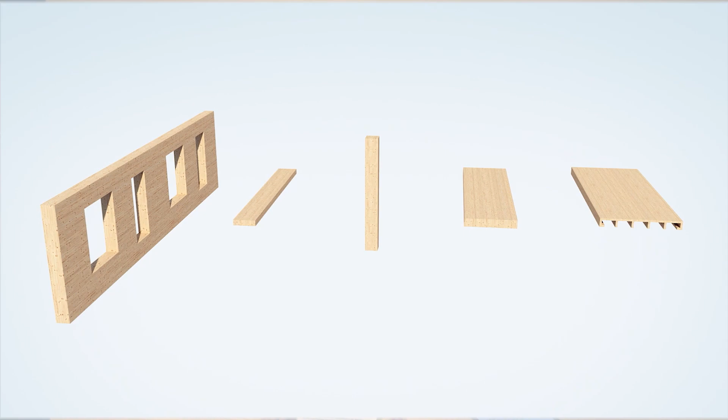Well, Stora Enso has been producing mass-engineered timber elements now for over a decade. In fact, we're one of the world's largest mass timber manufacturers. And all of the elements and components that we produce are made from sustainably harvested forestry. So what we do is we take these trees and then we produce these very bespoke components using the latest in CNC technology. So this is millimeter precision cutting and assembly.

And then what we find in the factories is that there's a very low waste, and the very small amount of waste that we produce, we then actually recycle into biomass energy. So it's a very sustainable form of manufacture. Once we've made these components, we then deliver them directly to the building site, and they're loaded in the perfect order for the build sequence. So this makes the actual assembly on site really efficient.

We've supplied now over 15,000 projects worldwide, and these projects are using components such as Cross Laminated Timber, Laminated Veneer Lumber, both beams and sheets and panels, and also our new products like CLT rib panel components for floors and roofs, also stair components and construction beams. But now we're doing more than that.

So rather than just supplying the material, what we're now trying to do is offer everyone the advice and the guidance needed to not only make these buildings very efficient in design, but also giving all the key information to make the right decisions for all the key stakeholders. So people like developers, investors, quantity surveyors. So we're not actually building these buildings ourselves, but what we're doing is providing the guidance and the best combinations of these different components to make the building as efficient and as cost efficient as it can be.

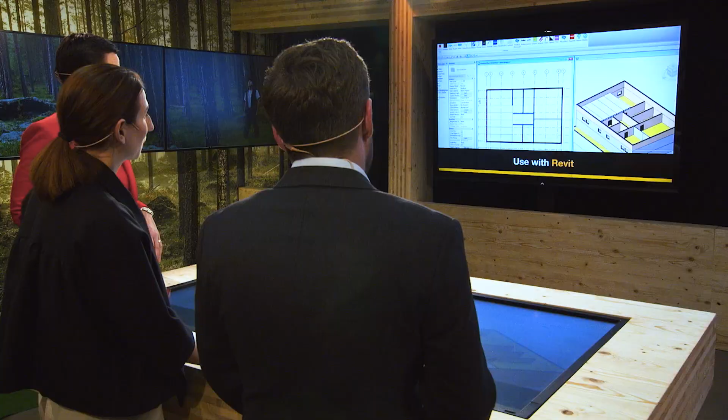Anything to add, Jessica? Yeah, for an architect, this concept brings you the grids that you can use when you're planning for a wooden office building, and the flexibility regarding the facades. It shows examples of how to reach building regulations applicable for most national building regulations within Europe. The build-ups are uploaded in our digital library called ProdLib, where you can drag and drop the BIM objects directly into your model.

For a structural engineer, it provides you the information on what product to use. And these are also in our structural calculation program, Calculatis, which is web-based and free to use, and you can be several engineers working in the same project at the same time. Another good thing about this concept is the information it brings regarding services. So the mechanical, the engineering, and the plumbing, called MEP. And it shows how to design these parts in the most efficient way. To get a quick overview of what we are talking about, take a look at this.

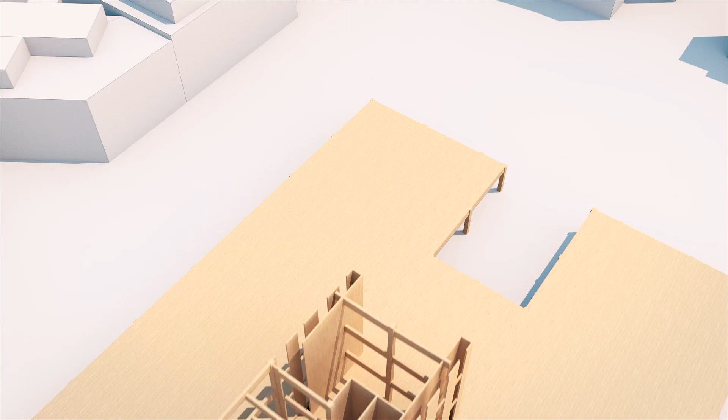Gareth, you mentioned the wood products like the CLT and LVL, and we see the applications here like the walls and the floors and the roofs, etc., and then the concept, of course. But how does it work? We have a screen here with the different parts on. Could you walk us through it? Yeah, sure. So I'll show you on screen.

I think one of the most common design features that we have in modern office situations is completely open plan. And there's a number of reasons for that, but the main one is that these buildings are due to last over 100 years, and the company's use of that building and also changing companies in that building means that it needs to be flexible internally.

So this very much leads to a beam and post design, or a column and beam design. This is taking most of the structure, and what that does is allow the internal walls to be non-load bearing, so they can be moved around and adapted in the future very easily.

So when we look at the columns themselves, these can be either Glulam or Laminated Veneer Lumber. These are very strong beam elements, and they can also have pre-fitted fixings that are very simple and easy to install on site, so they kind of just click together. And not only is that quicker on site, but it's also safer. There's less working at height and things like that.

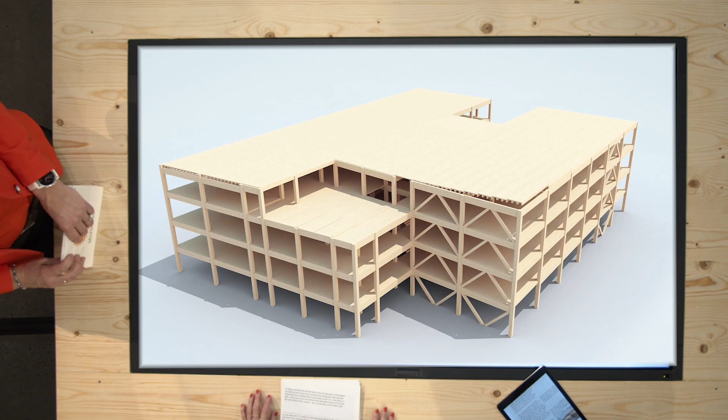And the whole idea of this concept is it provides the tips and advice to do just that, but it can also give you the confidence that it's going to be technically applicable, it's cost effective, and that its efficiency is high in terms of the overall building design.

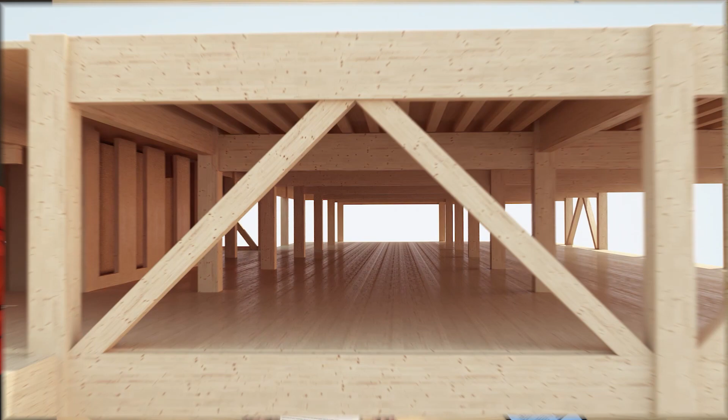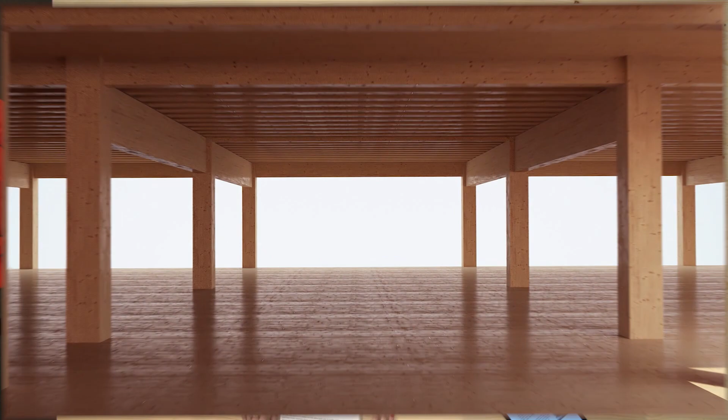So when we look at each of the individual products, first of all, we have Cross Laminated Timber, which is used primarily for walls, floors and roofs. But we also have LVLG now, and this is a new product that is very similar to CLT, but it's made from LVL instead, which is an incredibly strong product. And because these can be CNC cut, you can easily add openings, windows, doors and things.

When we move to the beams and columns, as I said earlier, this is primarily Glulam and LVL, but we can machine these to any length. And not only machining them to any length, we can also add things like slots for steel plates. We can pre-drill holes for beams. The whole idea of this is to make the assembly process on site as quick as possible.

When we look at our rib panel components, we have CLT rib panels, and this is where we have a thinner CLT panel, but with Glulam beams glued and screwed to the underside.

And because these are glued in factory conditions, when the glue cures, it actually forms this really strong composite element, and that means that we can span large distances under high load with very little deflection. And LVL rib panels are very similar to CLT rib panels, except we're now using LVL beams instead, with an LVL sheet on top, which is glued and screwed.

And LVL itself is an incredibly strong timber product. In terms of its strength to weight ratio, it actually outperforms steel. So we're talking about a really strong timber element that's also lightweight. And just to give an example of that, an LVL rib panel doing exactly the same structural job as a concrete slab is actually about a tenth of the weight. So that's what makes it so structurally efficient. So what we do is we take all of these different components and we combine them in ways that make a really highly effective office building design.

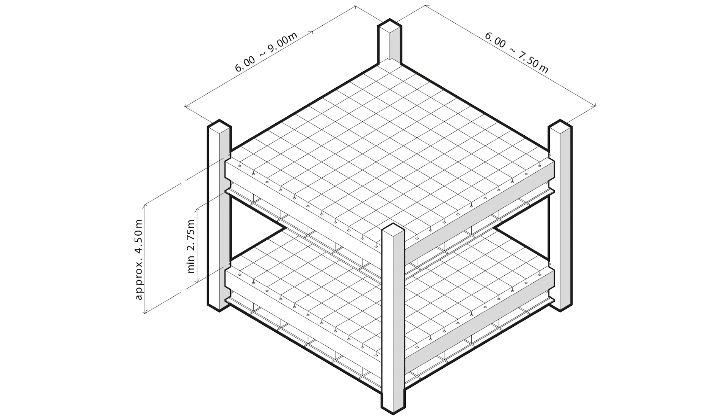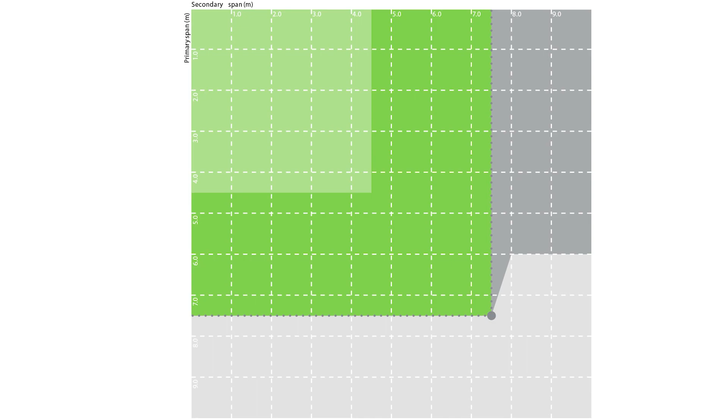The grid is one of the key things that in an office building you want to set out from the very early doors of your design. So we did a lot of work in the background to think what's the easiest way to give information that the grid is suitable for a timber solution. So we've put together a simple chart that will tell you whether the timber grid is efficient or not, and we've worked on that basis.

Well, we went through quite a lot of processes of how to coordinate the structure and services, because you want that zone to be in the same area. You don't want your building to go too high and push up costs there as well. The original option was a duct beam, but we thought that's not clever enough. How can we actually get rid of that, because that also has issues with it. So we've devised a system where we have corridor zones for your MEP to be able to sneak around the structure and poke into areas where it's needed. You don't have to go through a structural beam.

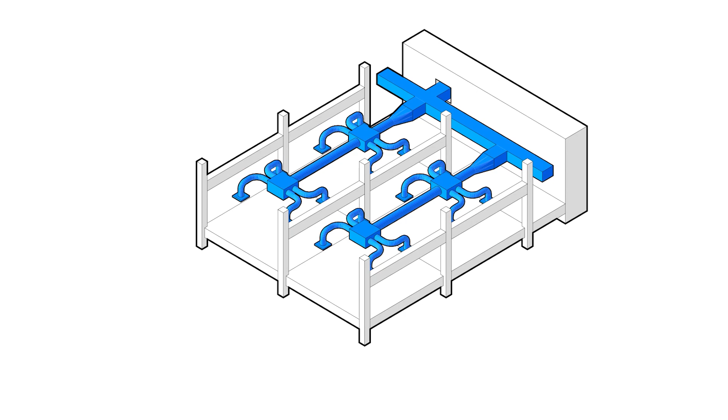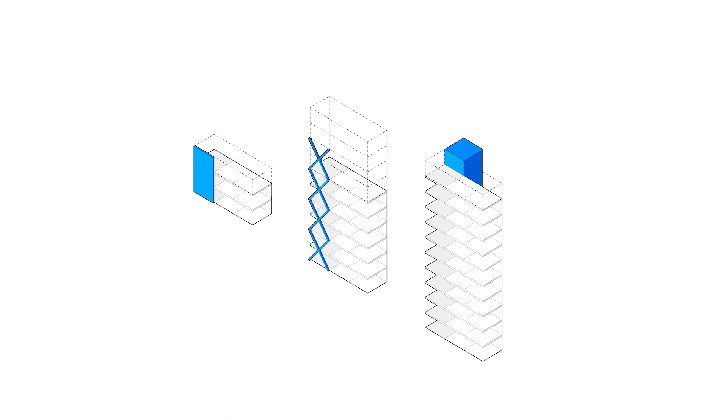In terms of height, again, this is a guiding hand, and your building stability will be key. We could have done this concept just for one building, but actually we want the concept to be for all timber buildings. So your stability will work in one of three forms. Either you'll have CLT walls, and that can do a certain height. If you're going a bit higher than that, you'll probably change to a braced glulam bay of sorts. And then if you're going really high, the likelihood is you can have a hybrid system with concrete as your core, and that braces the building, and then have a timber frame that can take the gravity loads.

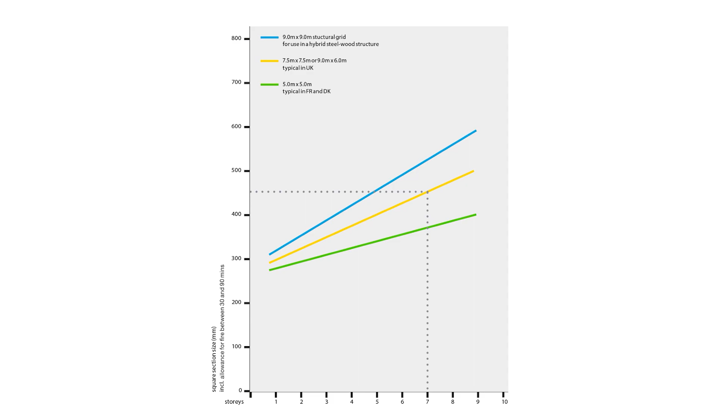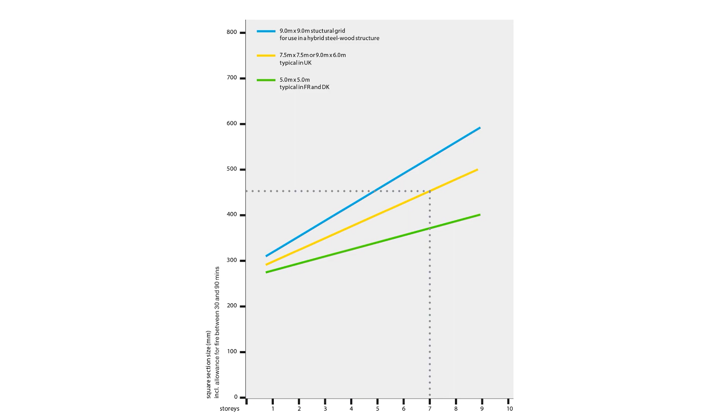The size of a column can affect the area that you have within your office. So it's quite key to be able to very quickly work out how big your column is going to be. So again, we've put some very simple tables together, and instead of relying on the load that, say, an engineer can read off, we've turned that into how tall is your building. So if you have a number of storeys and you've got a fixed grid, you can very quickly work out the size of your column, and that includes fire scenarios as well. So you've got an accurate depiction of what sort of area you're taking up with your column spaces.

Timber and connections go hand in hand, so you have to do one with the other. They're not a separate item like you can possibly do with steel and concrete. So with timber there are generally two forms of connections. You can go down a fabricated route with flitch plates and dowels and bolts, and that's quite a traditional way. Or you can follow the proprietary systems that have been developed over the last few years, which are clip in and go, and they're quite fast to erect on site, but they're also more expensive. So we've done a very high level information sheet within the concept here giving people the information. You can go for the fabricated one, and that can save you a bit of cost and a few other issues, or you can do the other, and that can save you time.

And then it's up to you as the contractor, designer, whoever you are, to pick for your building which one is the right solution for you.

For this concept, acoustics comes down to the floor build-up and how you're going to make that achieve a certain criteria. The interesting thing about this concept, again, it's not for one particular country, it's for many, many different countries. And they've all got many, many different regulations for their acoustics requirements. So the job we had was filtering that down into a performance criteria, and that is sort of a low, medium, high, and then you can pick which one is suitable for your building.

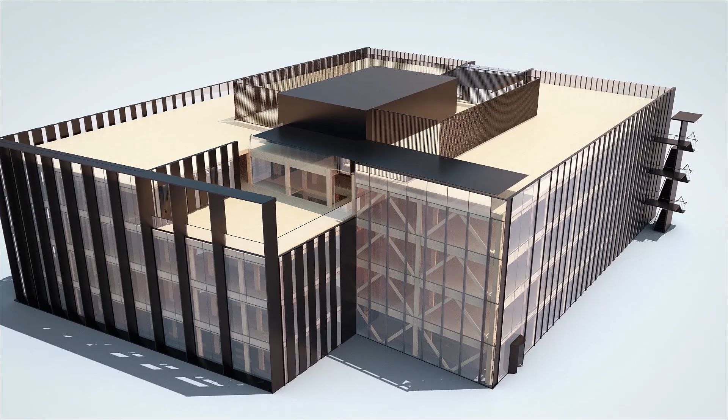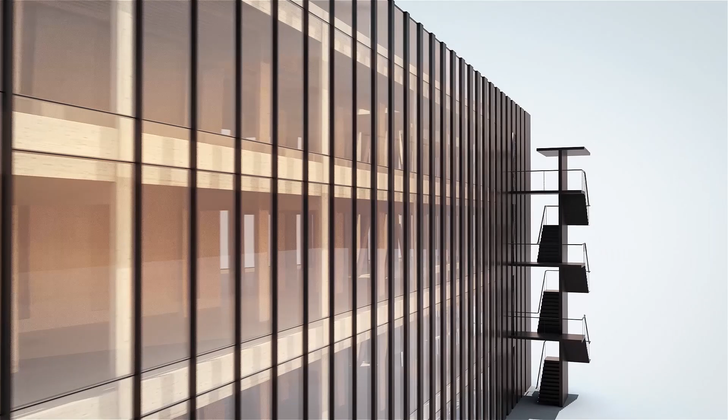What about the facades here? Are we forced to use a certain type of facade, or how is it? No, so the facade has no load-bearing function in this concept. And this means that you can build with most available facade systems on the market today. And therefore we can maintain the wide range of building styles that the architects and city planners desire. And it's very important to have an office building that mirrors the location and local setting. And it makes it easy also to push the project through the planning application process.

But the other thing is it's very important to provide the correct thermal and energy efficient properties to keep the energy consumption in the building in use as low as possible.

And talking about the architecture, Scott Brownrigg was the architecture firm that was involved with us in developing this concept. And we spoke to Ed Hayden there to see what has gone on behind the scenes and to understand this concept more from an architect's perspective.

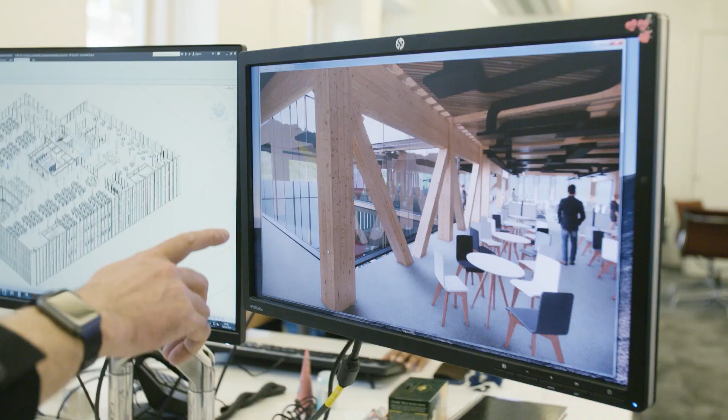For Scott Brownrigg, for me especially, we lead a lot on innovation and a lot on sustainability. So really this concept combines those two things very closely. So the idea of reducing carbon in building fabric and innovating ways of doing that is a really good match for Scott Brownrigg. So I'm Ed Hayden. I'm director at Scott Brownrigg architecture.

The key part of the design is to create many different forms of buildings. So it's very adaptive. It allows us to create linear buildings, tall buildings, urban buildings, buildings in business parks. So it has that flexibility of approach. So it's not limited, but it solves some of the key problems that you have when designing with timber, which is how do you integrate services? How do you ensure that it's a kit of parts approach, not a series of bespoke pieces, to reduce the costs? So we've designed a system which is comparable to steel and concrete in every way, but has all the advantages of the timber product.

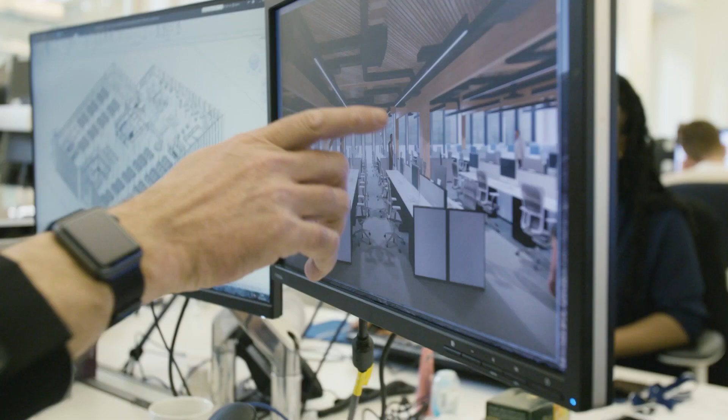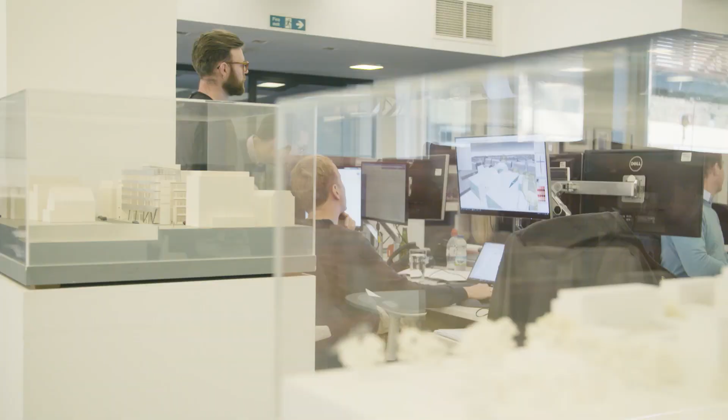A key factor when designing office buildings is to ensure that the building floor-to-floor height stays within certain limits, because that means that the external envelope doesn't get excessive, which pushes the cost up. There's a service run around the core, which allows services to be distributed throughout the building without bespoke holes and cuttings into the downstand beams.

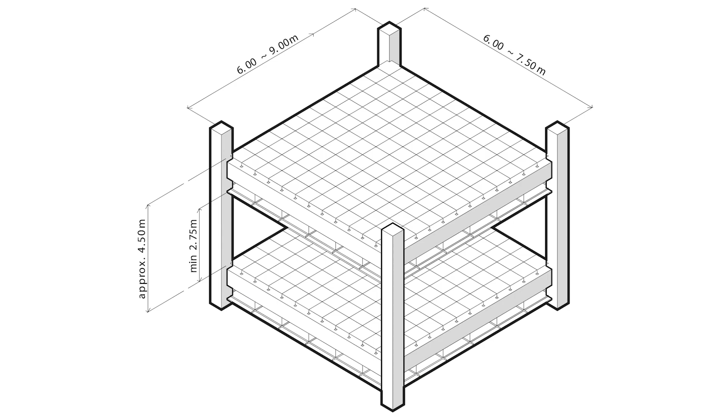So what you get is a modular system which is flexible enough to allow you to build almost any type of building. So one of the great advantages of using the timber over steel and concrete is, of course, weight. So the fact that the building has a much reduced weight compared with concrete means that the foundations and the structure behind the building are much reduced. So that gives you a huge advantage in terms of keeping the costs comparable between timber, steel and concrete.

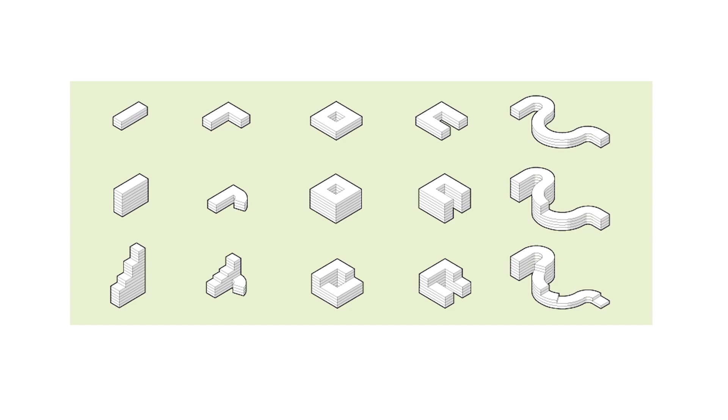The other advantage, of course, is it's a modular system. It's a systematic approach, so it's built in the same way. So it comes to site and it's kind of clipped together on site. So there's a lot less manufacturing or bespoke work on site.

So what this allows you to do is to make truly sustainable office buildings. It allows you to build them in almost any form and any plan layout. It gives you the knowledge that service distribution's been considered and worked through. It also allows you to be sure that acoustics and fire have been addressed.

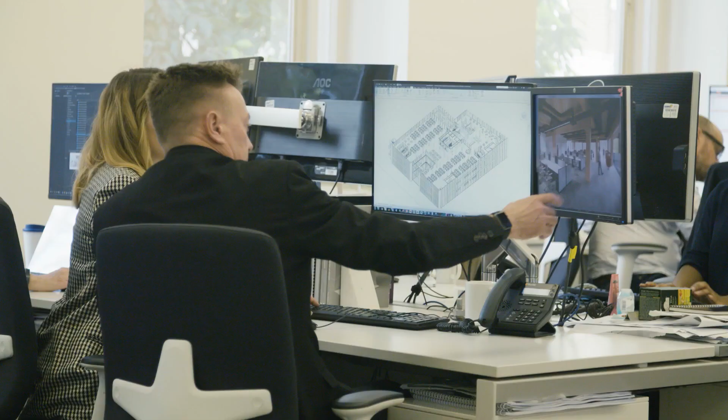It's very carefully designed to use the properties of LVL and CLT, especially the use of LVL rib panels. Now they give a good fire performance, but they also give a great span whilst maintaining a clean timber soffit. So the soffit appearance is really quite attractive and uncluttered, whilst giving you great spans without additional downstand or other timber structures.

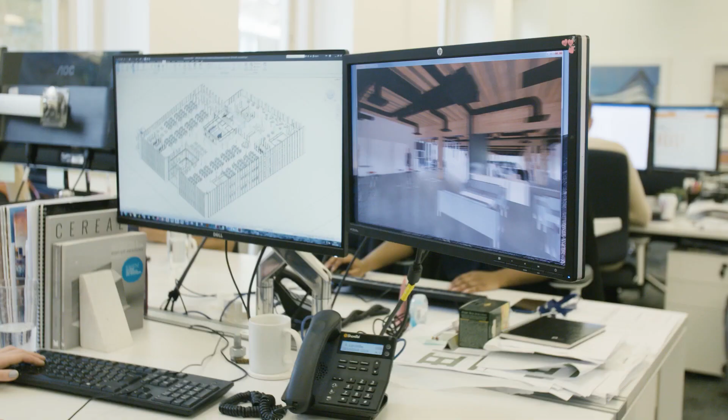Designing timber buildings in this way is very straightforward, because if you're using steel, you have to think about fire protection of that steel. It's a big issue. You have to either overclad or you have to use intumescent paint, which spoils the appearance of the steel. Using concrete, it's wet trade on site. It's quite a messy trade, and it takes time.

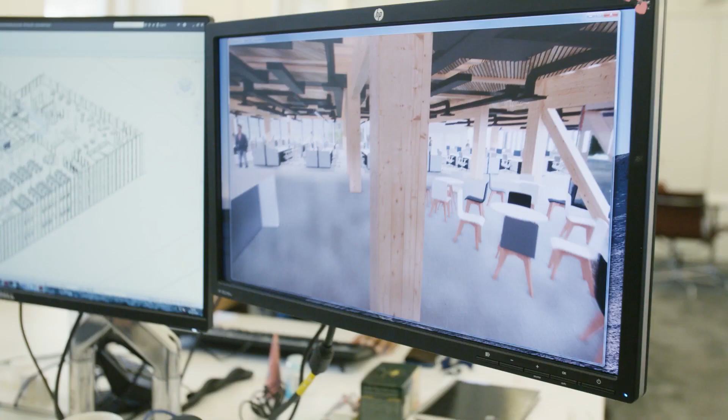So the timber system has this modular approach. Using proprietary fixings, it's a clipped together system which arrives on site, incredibly quick to erect, doesn't require further fire protection, and doesn't involve the wet trade. So it's a great way of designing office buildings.

Both Ed Hayden and Alan Dowdell talk about different aspects of this concept. But the part about services is particularly interesting, isn't it? Can you tell us a bit more about that?

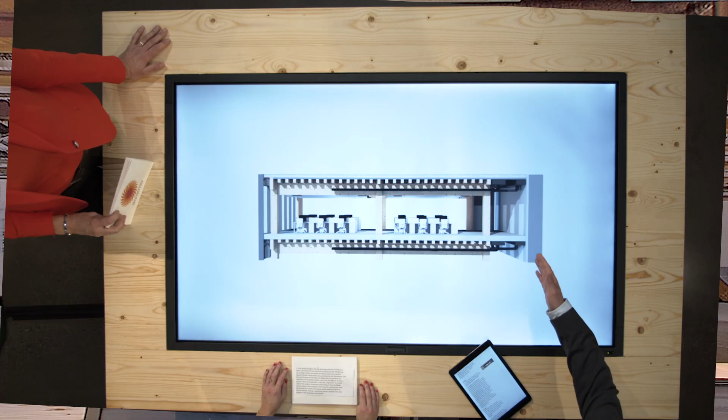Yeah, I mean, this is a really clever way of designing the heating, the ventilation, and the water systems in these buildings. It solves a lot of the common problems that we have in normal building design, where by having this circulation corridor, having a short span, it means that we can get rid of beams in that particular area, and that's where all of the main service runs are focused. And then these feed off into the communal areas.

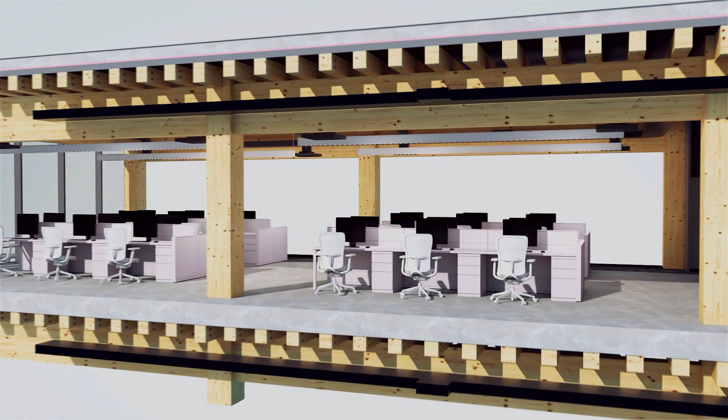And this is a really big benefit, because what it means is we increase our maximum floor to ceiling height, but it also means a thinner floor depth. And that's really important for office buildings because the majority of office buildings are built in dense cities, where a lot of the time they have height restrictions on the overall height of the building.

So by having thinner floor systems and a thinner floor build-up, that means that you can fit more stories in that same height, which in turn means that you have a bigger gross floor area for the owner. And obviously, in turn, that means a greater potential future income from rents from that building. Very important for developers, of course. Anything to add on the services?

Yes. This service design is also a big advantage with our concept because it saves a lot of time during construction on site. Mainly because of the setup, it makes it easier to install. It's quicker for the services to be installed.

And the speed of timber construction, less groundwork and foundation, and the overall speed for the following-on trades doesn't just allow the building to be completed earlier, so the next one can begin. It also gives a quicker return on investment.

And that's a huge impact on the overall cost of a project, because investment and funding of these kinds of projects carries rates charged on loans for construction, of course. And by decreasing the overall construction period, the loans are taken for a shorter period, making a significant saving in the interest cost charged to the developer and investor.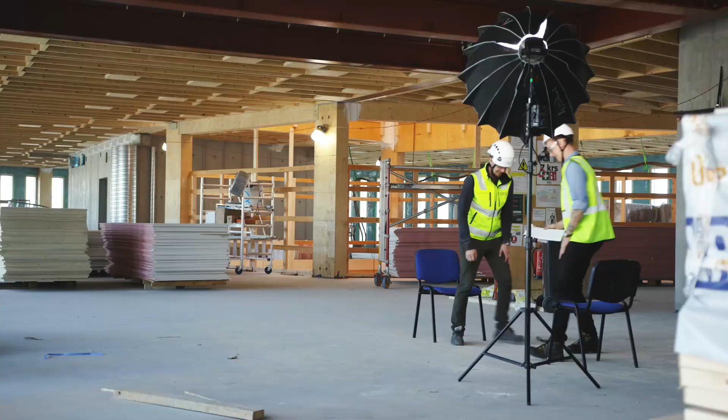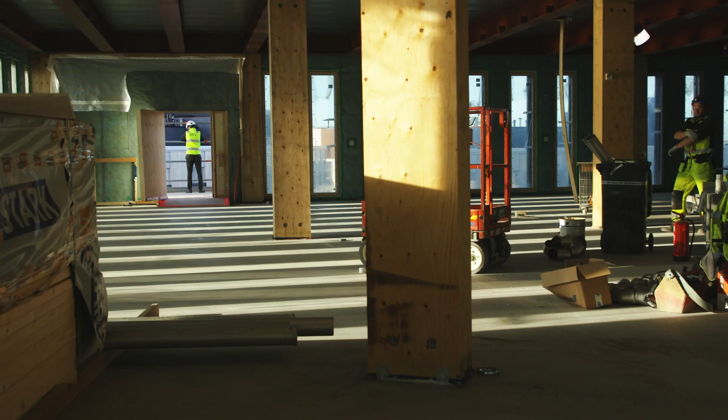The Wood City project started in 2010 when SRV, Stora Enso and City of Helsinki came up with the idea that we should build up a wooden quarter in this great area in the south side of Helsinki. So next year we held an architecture competition which was won by Anttinen Oiva Architects, and since then we've been developing this true hybrid quarter combining housing, hotel and office spaces. For us it was an amazing opportunity to design a unique hybrid block to such a unique and important site in Helsinki city.

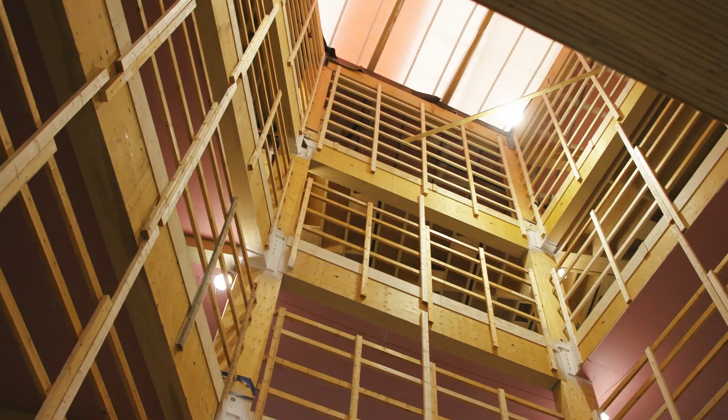I've noticed that when people are entering the spaces where the wood is present, it has a very strong effect on the people. In interior spaces, we are leaving the wood visible as much as possible. And we are doing it because obviously it creates a very comfortable, relaxing and calm atmosphere.

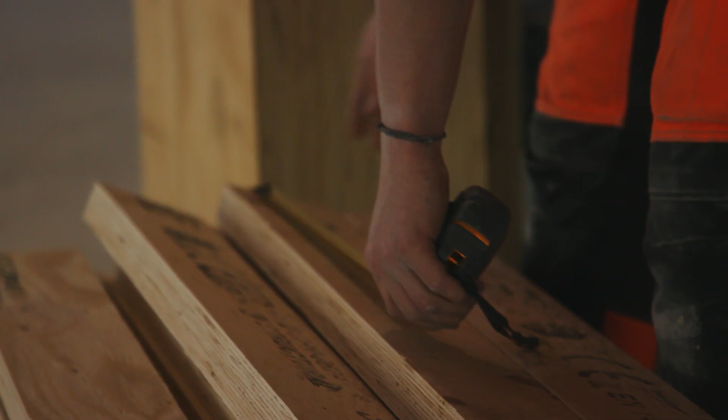Everything has gone so far very well in this project. We have been efficient with our element manufacturing, delivery and installation at this Wood City office building site. The whole quarter is planned to be finished by year 2022. It is more than the office. There have been 2 multi-story apartment houses and they are already there. And then there will be a parking hall and that is already under construction. And then there will be 1 hotel coming to the same block.

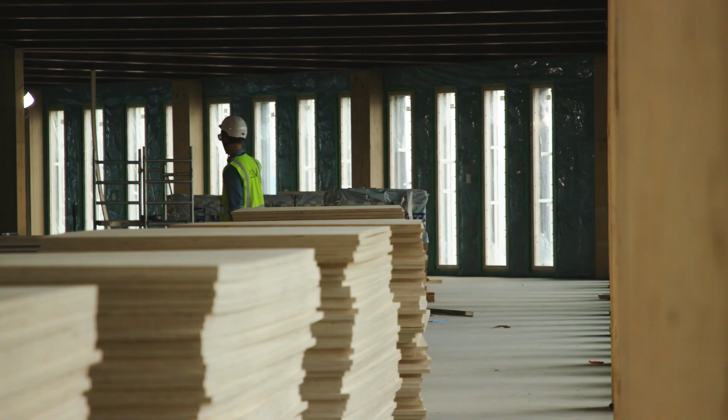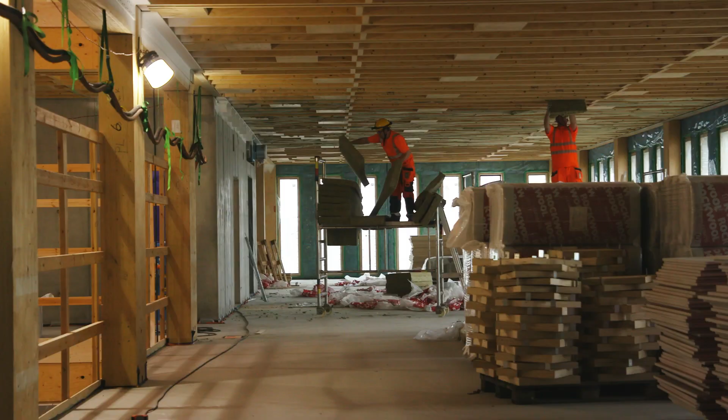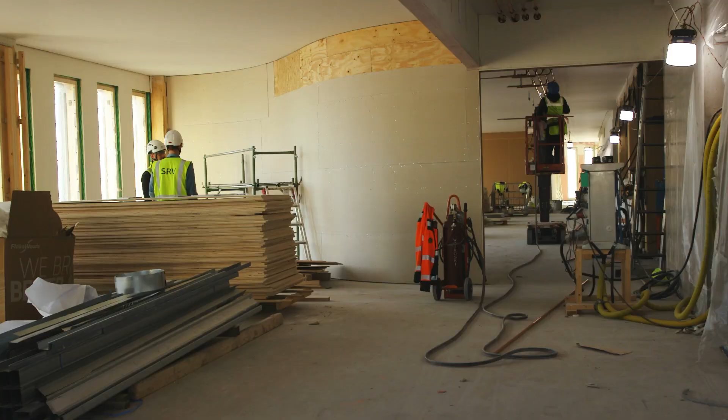The main benefits for building with wood are the installation speed, the environmental impact, and mainly because wood is a renewable material. The material cost of wood is a bit higher compared to other construction materials, but achieving shorter construction time can actually bring some savings. So by using wood and prefabricated elements, we can actually achieve a shorter construction time.

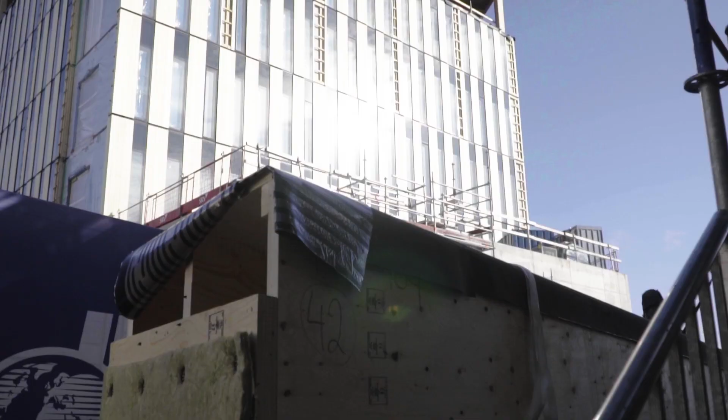LVL is the strongest wood-based material relative to its weight, and we've really gained all the benefits of LVL in this office building. With LVL we have been able to build longer spans with LVL rib panels. Also we have been able to build a high load bearing structural system with LVL columns and beams.

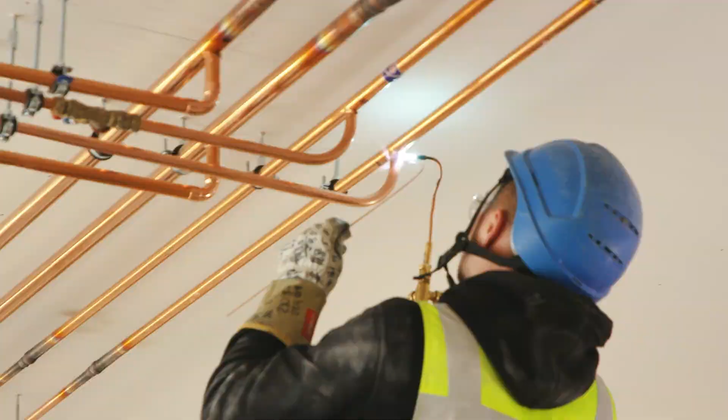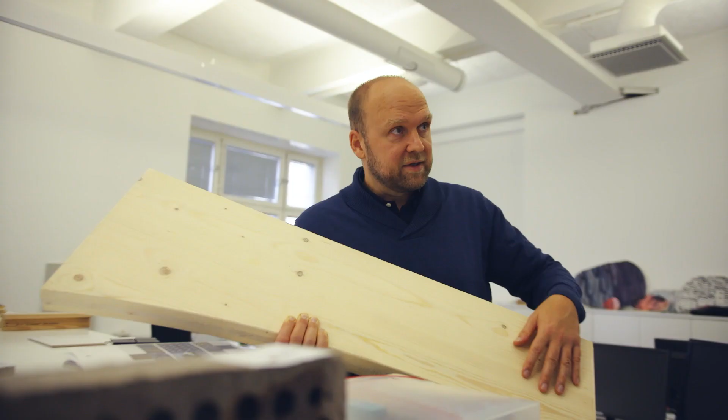I'm actually really proud of the Wood City project and the design. I personally really believe that wood is a construction material for the future. So do I believe in building with wood in the future? Yes, of course. I truly believe that with this Wood City project we are gaining the first references and the knowledge to build wooden buildings on such a large scale in the future as well. And it will be beneficial for our company.

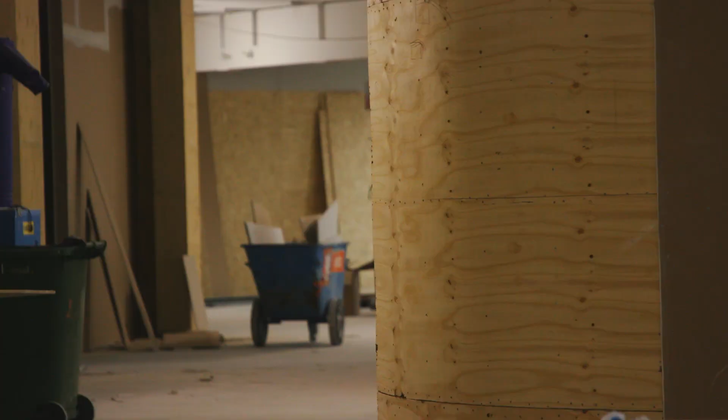Sustainability and ecological values are a rising trend all over the world, and this is a beautiful example of how to build a modern office building from engineered wood product, in this case LVL. It's great that we now have an office concept based on which we can share and inspire all stakeholders to utilize wood in their future projects. Wood City is a real live example, and it's being built as we speak.

I want to hear more about other references as well, Garrett, but I know that you have some interesting facts about Wood City. Yeah, Wood City is a really fantastic example of sustainable construction. If we just take the timber that was used in just one of those buildings, it was regrown in a Finnish forest on a sunny day in about 20 minutes. So by the time people have watched this show, we've already regrown enough timber to make that building again. And that's a real key fact. It's not just about the carbon that it takes out of the atmosphere, but also about the fact that it's renewable. Amazing.

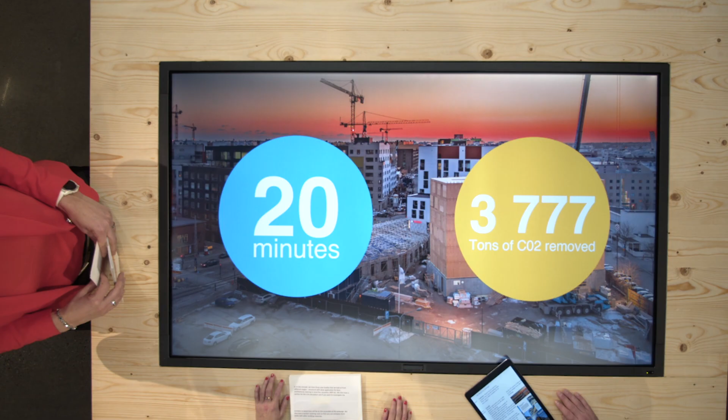And in terms of carbon, this building removed 3,777 tons of CO2 from the atmosphere. So how much is that? That's around the equivalent of 1,400 annual car emission journeys. So these buildings are not only sustainable, but they're actually cleaning the planet. It's a form of construction that actually cleans the planet rather than producing carbon. And we will talk in more detail about sustainability later on, but it's important to see the key facts now.

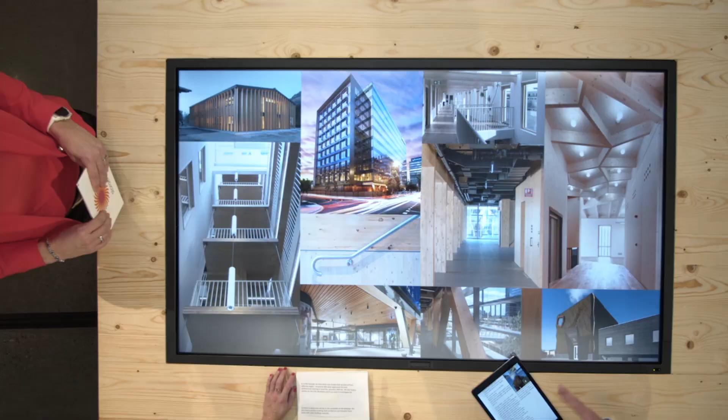But coming back to the question about other references, do we have any other references around the world? Yes. As I said earlier, we've delivered over 15,000 projects, but in regards to offices, we're currently working on 40 different office projects all over the world. And there are some fantastic examples, so I can run over a few of them. This is 25 King Street.

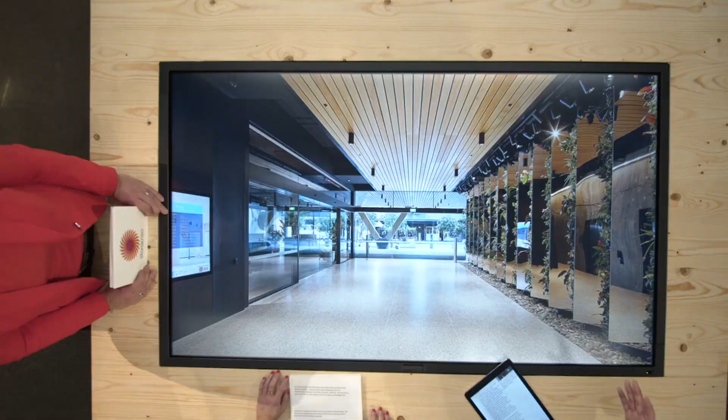25 King Street is currently Australia's tallest timber office building, and it uses open plan space. It's around 15,000 square meters, and it used about 6,500 cubic meters of CLT and Glulam. Even for a building of this size, the timber is regrown in 106 minutes. So in less than 2 hours, the building can be completely regenerated again in forestry. It also received a number of WELL certifications. So not only is the building very beautiful, but it's also very healthy for the occupants to live and work in.

And another building very similar to this is International House. This followed a similar design method in the sense that it's a beam and post design with a braced Glulam system around the external facade. And this is actually one of the most sustainable buildings in Australia. It's received the NABERS 5-star energy rating. So again, it's not just about making carbon neutral construction and the speed that it's regrown, but it's also making buildings that are energy efficient for their entire life usage.

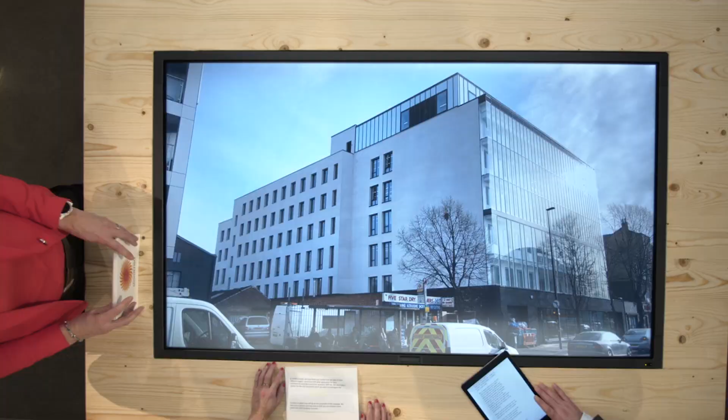And just the final one here, this is a bit closer to home for me. This is in London in the UK. And this is the Greenhouse, and this is kind of different because it was actually the renovation of a derelict 1960s concrete building, and what they did was add an extra level to the roof, and then they also extended out to the back, and they actually grew this building by about 50,000 square feet.

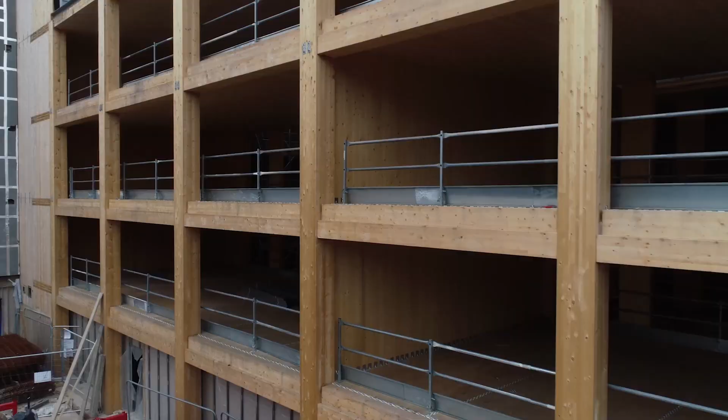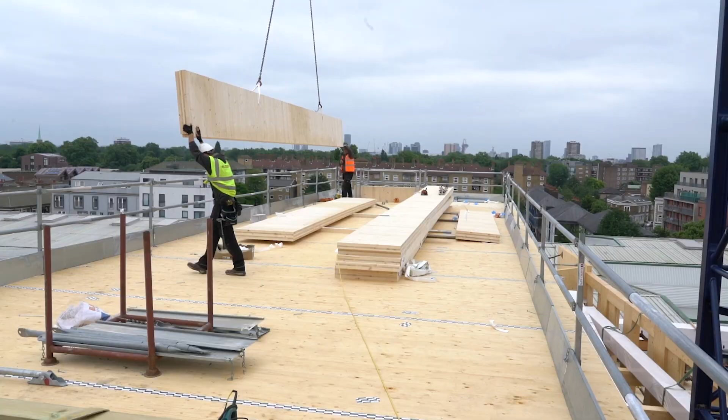Looking at the carbon details, this is around about 1,000 cubic meters of CO2 that was taken out of the atmosphere. It was installed by a team of just 5 people, and it was built in 8 weeks. So it's about 8-story buildings built in 8 weeks, and we see that kind of speed as typical across all different types of building projects. But probably a key fact here is that since this new extension's been added on, it's actually increased the overall efficiency of the building by 50% in terms of energy.

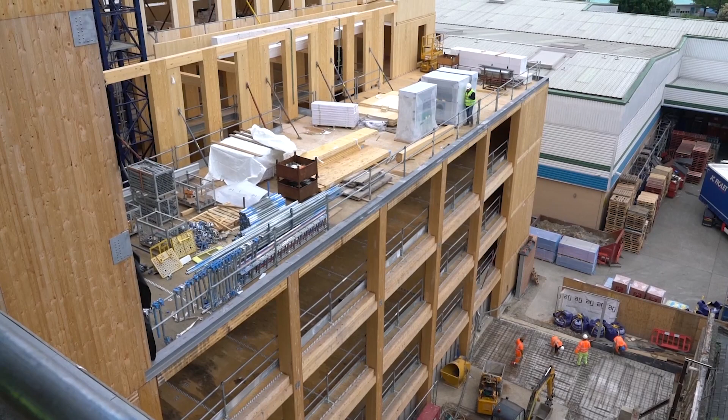I think these kind of projects are really great to show that the concepts are not just for brand new buildings that are built in the middle of a field. These kind of guidelines and advice can be applied to lots of different sites and lots of different types of construction. You've shown us a handful of beautiful projects and references here, but if the audience wants to look at more of these projects, can they do that?

Yes, we have collected the ones that Gareth mentioned, but also a lot of other projects, both residential, commercial of course, but also educational buildings. And we will post them in our reference library that we will launch in the near future. And there you can find information like where, when, who, which structural engineer was involved in the project, which architect. What kind of products maybe? Yeah, of course, what kind of product, the volume, also the stored carbon. So it's a lot of interesting information that you can be inspired from. Then I'd urge everyone in the audience to keep an eye on storaenso.com and access this library.

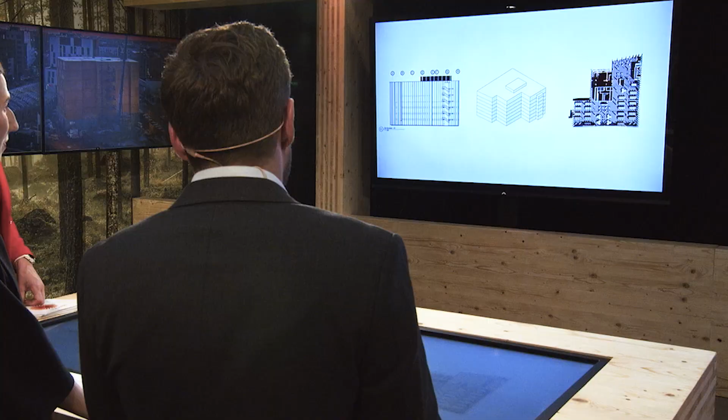This concept, though, has case studies as well. What do they show us? Yeah, in this concept we have 3 case studies that we look at from different angles. Structurally, with what application fits best. Architectural, bearing in mind the fire and acoustics, but also the MEP. And we have a section for the LCA calculation. And if you want to look more in detail at the numbers that we're providing, more data will be accessible at the webpage where you download the actual concept. And we also have a section covering costs, so you can compare this wooden alternative easily with other building materials.

And being the renewable material company, of course, sustainability is one of the most important reasons why we are doing this. But how is the discussion with your customers when you meet them about forestry and building in wood? Yeah, so let's start by asking, when was the last time you took a walk in the forest? Walk in the forest. It was a bit of time ago. Yeah, but the last time, do you remember the feeling of peacefulness, the smell of the trees, and also how the fresh air was streaming into your lungs? You create nice pictures in my head, at least. So now imagine bringing this indoors, where we spend about 90% of our days. Wood buildings can make that happen.